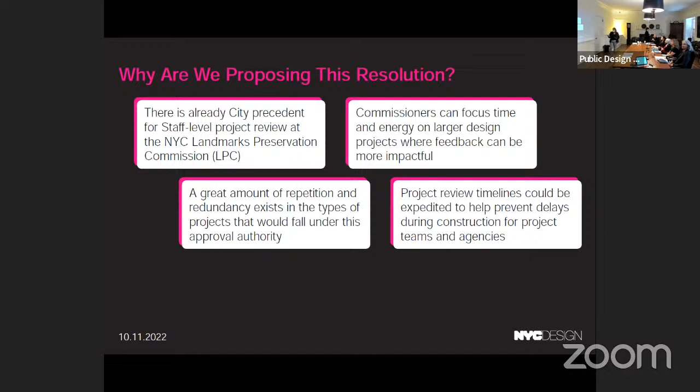There's already a city precedent at the New York City Landmarks Preservation Commission. We think commissioners can focus time and energy on larger design projects where their feedback can be more impactful. A great amount of repetition and redundancy exists in these types of projects that would fall under this approval authority. Timelines could be expedited to help prevent delays during construction, and lastly, many of these projects submitted to PDC are either invisible or minimally visible to the general public from the right of way.

So what is this resolution? We know we can further improve the functioning of the PDC as it fulfills its purpose to review works of art, structures, and layouts of public ways and grounds. It proposes to delegate authority to the PDC executive director for the review of minor post-approval modifications—projects such as building systems related to codes, regulations, and standards, and small-scale projects that vary minimally in design.

An example of this is when an ADA push button that was on a freestanding pole moved to the glass surface of the door itself. This solution was not foreseen at the time of approval. So now if I see this and staff sees this, we would be able to put it on the list because it falls under all the criteria.

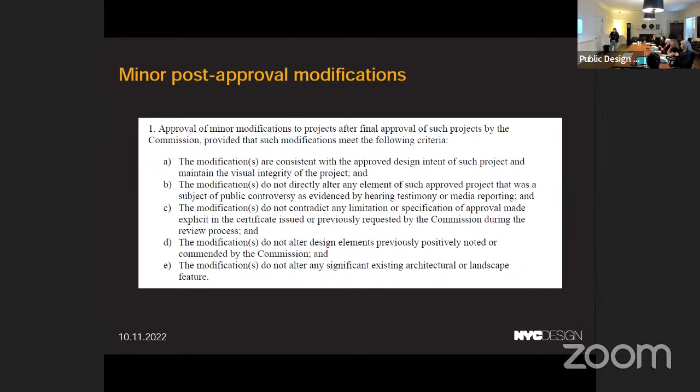The criteria are as follows: the modification has to be consistent with the approved design intent and maintain the visual integrity of the project. It should not alter any element that was approved and was a subject of controversy as evidenced by testimony. It does not contradict any limitation made explicit in our certificate, or if requested by any members of the commission. It does not alter design elements previously noted or commended, and lastly, it does not alter any significant existing architectural or landscape feature.

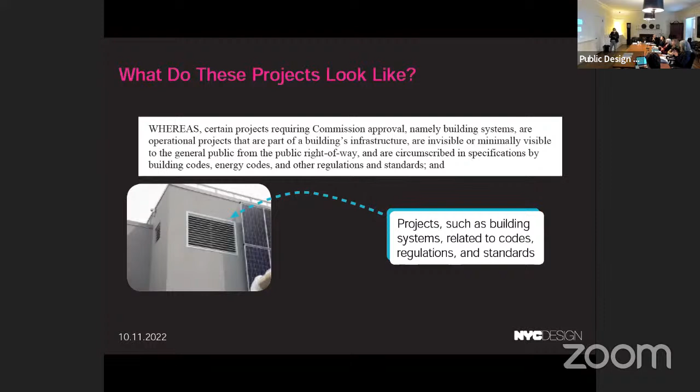Another example of this is mechanical systems related to building codes—circumscribed in specifications in our energy code standards and other regulations. Also, technology evolves, so these often come back to us repeatedly and we have to keep putting them on our agendas, but in this case we could handle it and then put it on our list.

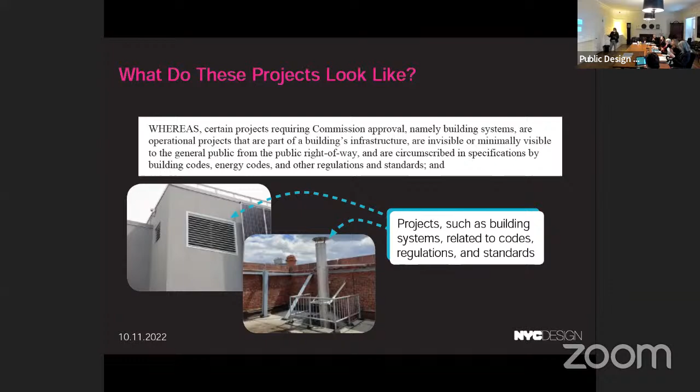These systems must be invisible or minimally visible to the general public and not change the character of the building or site. They should not remove or alter any significant architectural feature and should maintain visual integrity. Through-wall installation should be minimally detailed and not detract from the building or its features.

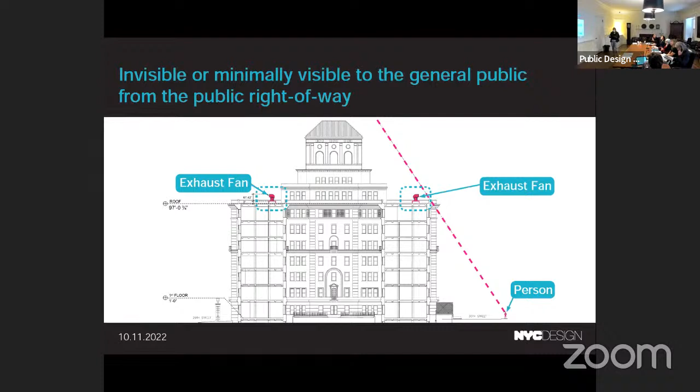An example of what we mean by minimally visible is this: if you're standing on the street or sidewalk, you can't see it. If you can see it and it's very extensive or expansive, we don't put it on this list, or if we do, we can take it off.

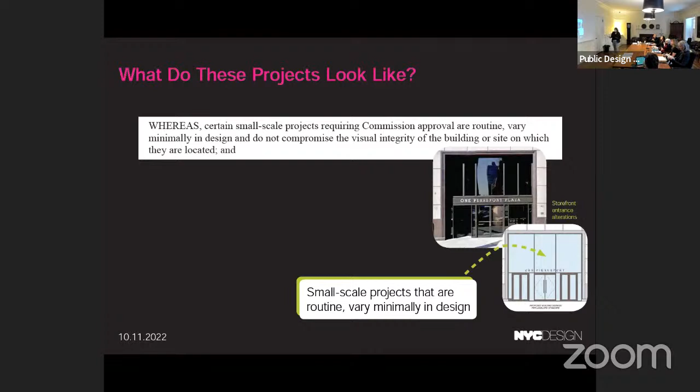So what do these projects also look like? Small scale projects that are routine and very minimal. For example, this storefront entrance alteration going from this to this, or this 7-Eleven signage staying in the same place but perhaps being illuminated.

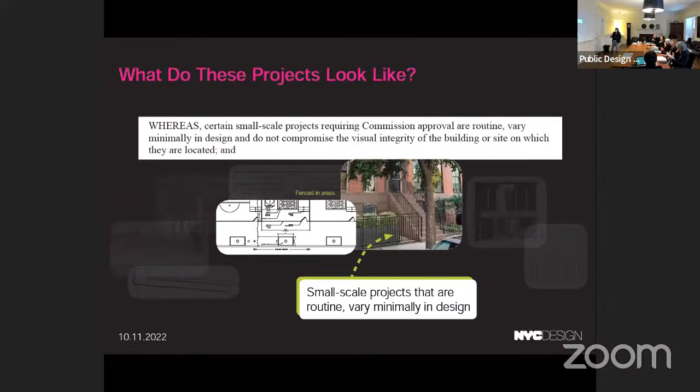So these are examples of projects that would apply, and also ball field pole lighting—things we see often and feel we don't have to always bring in front of the whole commission and put on our agendas. So this is all of them at once.

Small scale projects that vary minimally—these are the criteria that they have to follow.

Essentially it has to keep with the character proposed in the same location, in keeping with ADA guidelines. They do not extend beyond the adjacent properties, and ball field lighting should just meet the standards of athletic field illumination.

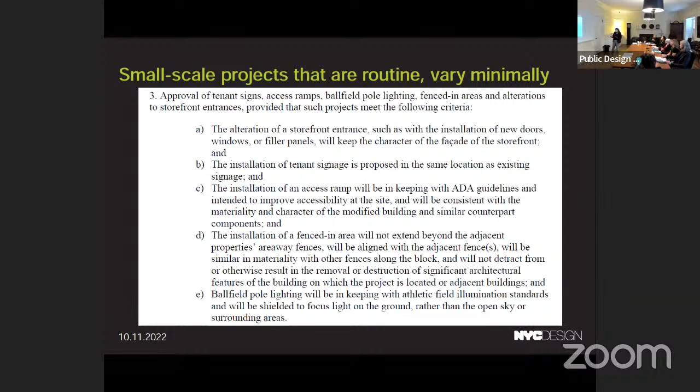And we, with our commissioners, decided that at least one member shall determine that a project falls within one of the categories described above before it's approved by the ED, or the PDC's next senior-most director in case the ED is on vacation or absent.

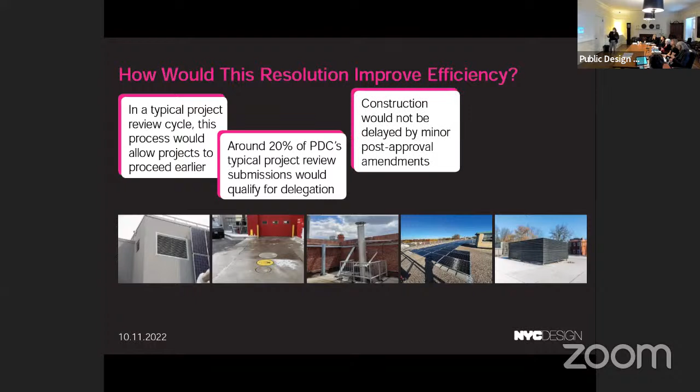So we feel this resolution would really allow projects to proceed earlier. Around 20% of PDC's typical project review submissions would qualify for delegation, and this is really a matrix of images that apply. Construction would not be delayed by minor post-approval amendments.

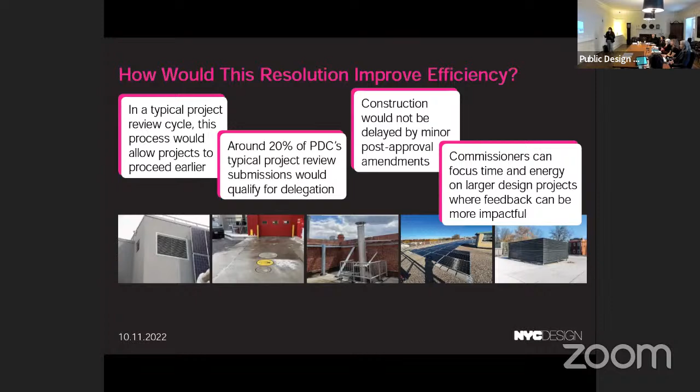And lastly, reiterating that this lets you focus time and energy on larger, meaningful projects, especially those in the public eye, that wouldn't apply under this delegation.

Here's the image of the text, and this is what we will be voting on today, which is in writing what I just presented to you today. Any questions?

Is it a requirement or a suggestion that one member of the commission will approve, question, or review? Or do you draw the one person from, let's say, three or four on the commission who have technical expertise, which for example I may not have? No, of course, other things. So that's my big question first, just to understand that.

Yes, so we spoke with Ken Smith at length about this because we very much appreciate his perspective that there should be oversight, and that one person who wants to look at it or volunteer should be able to do so. He has volunteered this time around, and in the event he is unable to do it anymore, we would talk amongst ourselves again and figure out who else could do it. So this wouldn't just fall upon someone without them being willing to take on the role or having a desire to.

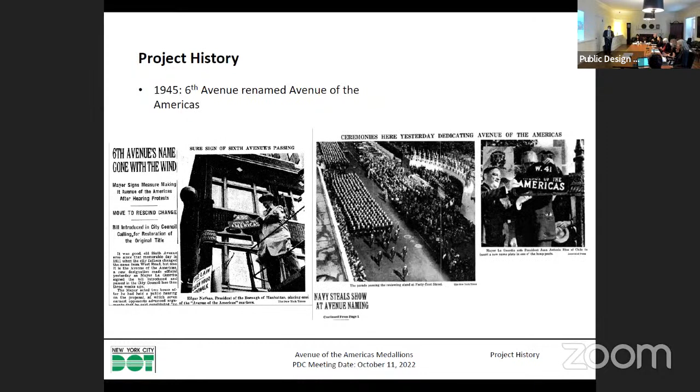In the 80s, the city refurbished the medallions to bring them back to a state of repair, but time has taken its toll, and they've continued to see deterioration since. The brackets holding them up have deteriorated over time, and the porcelain itself is a very heavy material, making it difficult for the agency to maintain. So we've made an effort to keep this program going while bringing it up to modern-day standards, including redesigning the bracket that holds them and updating the graphics.

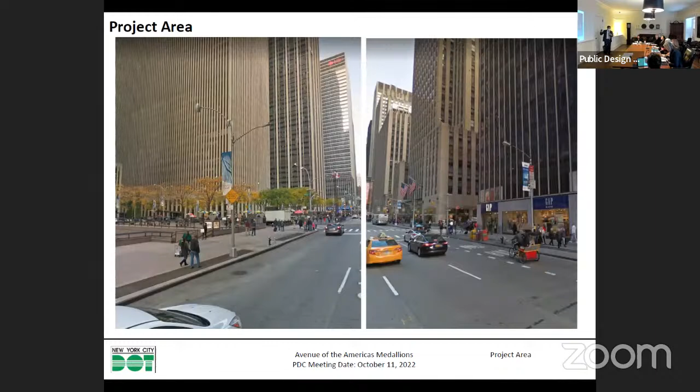So just to give a quick overview of the project, I'm sure many of you are familiar with 6th Avenue — pretty typical. This is up in the 50s and high 40s where we're looking to install the medallions. The medallions themselves will go on the light poles, similar to how they're currently mounted — we'll show you that shortly. They won't go on any pole that has a traffic signal or signal infrastructure.

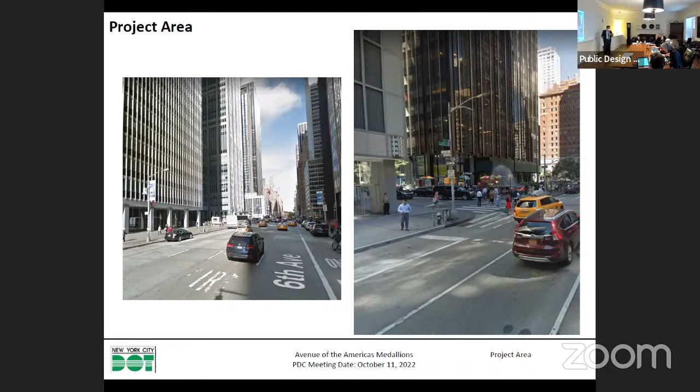From a safety perspective, almost nothing goes on those types of poles. Another thing to point out is we're also planning to ban the use of banners wherever these medallions are installed, so there won't be visual clutter competing with them on the poles. Here's an example of one that's actually up there — this is at 57th Street. You can see the bracket and the medallion installed towards the top of the pole.

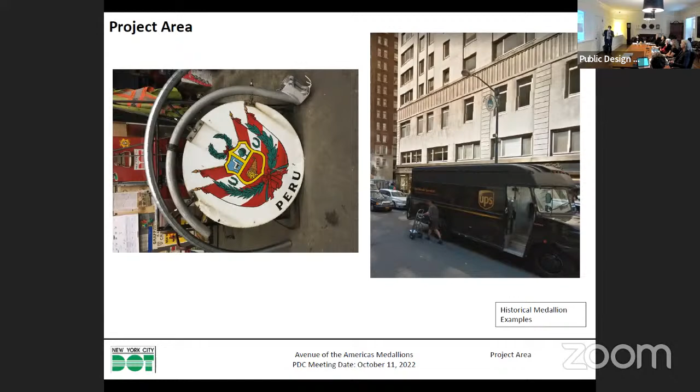Here's an example of one we had to take down in our shop — you can start to see some of the deterioration that's occurred. This is probably one of the better ones we have, actually. And here you can see additional examples still up on the poles.

Here's an overview of the locations we're looking at, again this is the 42nd to 59th area. There are a few poles with NYPD security cameras, so we won't install where there's a conflict. These are all mid-block poles, except for the ones highlighted in red, which are corner poles, but they don't have any traffic signal infrastructure on them.

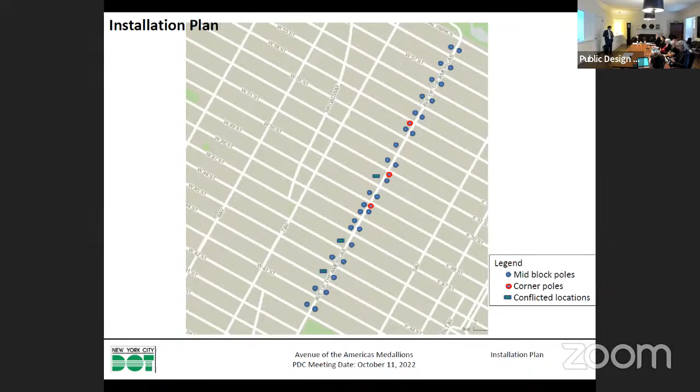This is the medallion we presented back in 2017. You can see the new bracket design that's made completely in-house by the agency, so we can fabricate these ourselves. If one fails, we don't have to go through a lengthy procurement to buy a new sign—everything is done by our sign shop.

This was the original design we mocked up, which hewed closely to what we had seen previously. Some comments from the commission were about improving the legibility of the coat of arms. These signs are installed quite high, and the coats of arms tend to be quite detailed—we can only do so much. We're not going to change each country's coat of arms, but we looked at how to improve things: studying the typefaces and colors for each country's name, and making an effort to remove some or all of the banners, which we're doing.

So again, this is the original, what we showed you in 2017, and you can see the medallion in front of you. This is where we're currently at.

We really did try to look at the graphics intensively. I have Kim Sillen from our graphics team, as well as Shane Stumiller, an urban fellow with urban design—sorry for not introducing them at the outset.

Kim can speak to a lot of the graphic details. We looked at a number of fonts, the location of the font, the color, the typeface, and tried to arrive at something sympathetic to the proposal—a font with a bit of character that works well with the coat of arms, and how the overall graphic is composed, so we bring the coat of arms closer to the viewer by putting the font on top, picking a font that has a nice relationship with the overall coat of arms.

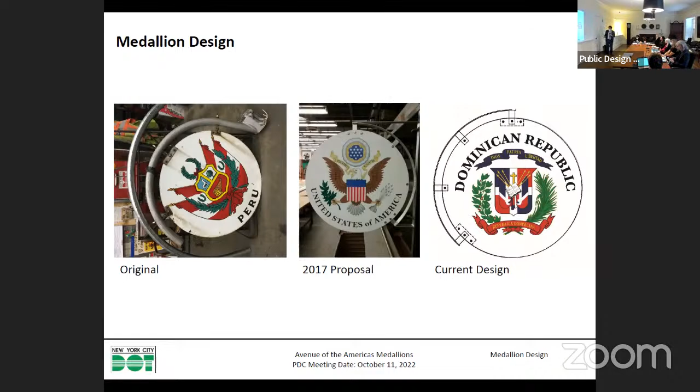Here are the design details—happy to come back to this slide at the end for questions—but this covers the type of font, case, size, location, and the size of the coat of arms. They differ a little based on each country, but are generally in the 2-foot range. The bracket design, as mentioned, is the same as we showed back in 2017—a new bracket design, but one we can manufacture in-house.

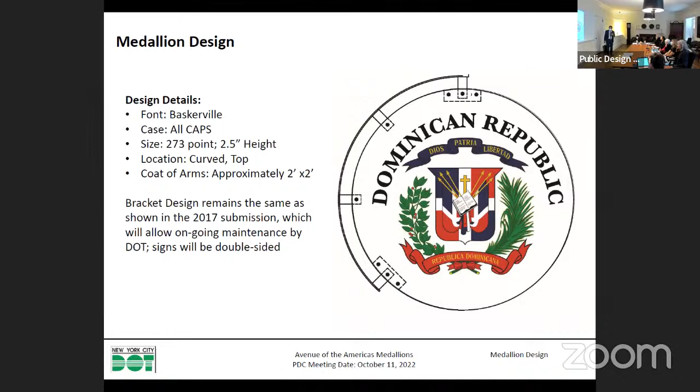In terms of what we studied, we looked at all the signs across the various countries. First, we looked at the shortest country name, which happens to be Peru, the longest country name, and then Trinidad and Tobago, and picked out a middle-length name to get a sense of what the composition looks like across these different countries.

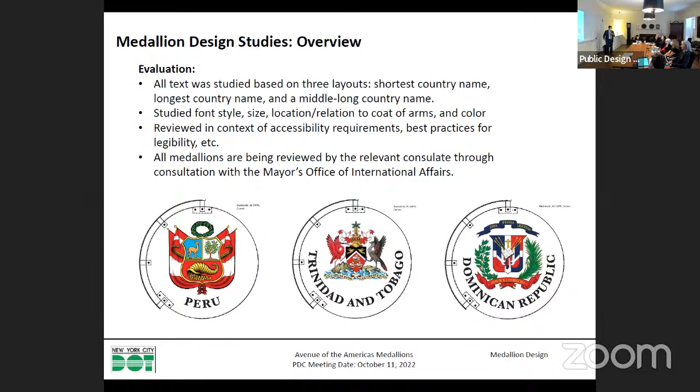It has some detailing that makes it a bit statelier than some of your simple sans serif fonts, like a Helvetica or an Arial. And so we think that really makes sense in this context.

You're gonna do 35 medallions for $150,000? Yes, actually less than that. Because it's all in-house, that's the difference. Of course, we have lots and lots of aluminum because we maintain hundreds of thousands of street signs across the city, so there's a bit of an economy of scale that you won't get commissioned.

Again, we moved the font to the top to try to bring the coat of arms down a little bit, making it more legible to people walking by. These signs will be mounted 25 feet in the air at the top of the light poles, so we're trying to bring the more detailed elements closer to the viewer.

We looked at a couple different colors, but for contrast, legibility, and ADA purposes, we stuck with black. There's also an option in a navy color, but we want to make sure this continues to be legible in all contexts. And all the banners are going to be removed, so it's not competing with anything for legibility.

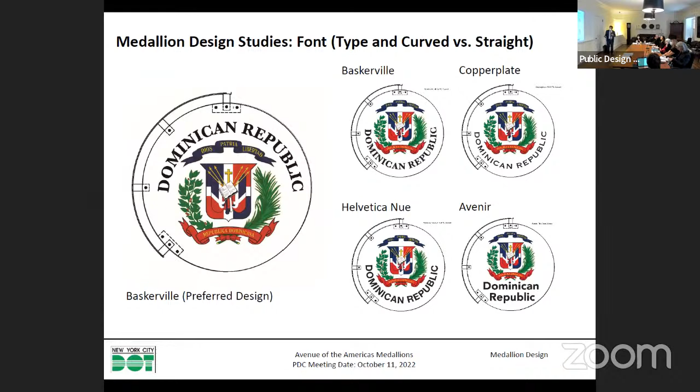So again, these slides just look at some of the different fonts we were looking at, as well as whether it should be a curved profile or a straight profile. We also looked at font type, whether it was condensed or regular.

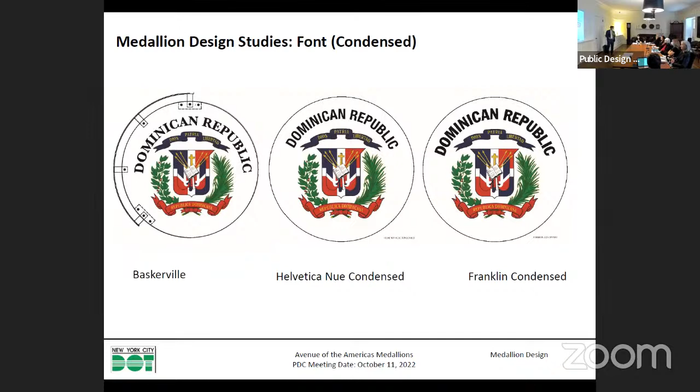On the left you'll see the proposal, so you have that as comparison across all the studies. Really focusing on trying to make sure this is as legible as possible—that's been our main goal. Top versus bottom, uppercase versus lowercase, black versus a dark blue.

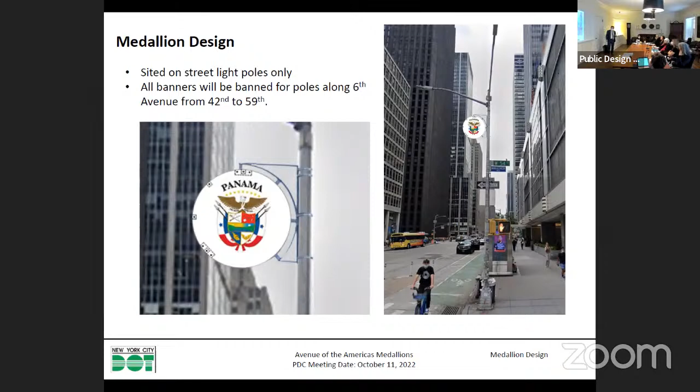And then the bracket being mounted on the side allows for it to be located a little bit lower on the pole too. These are the sign brackets, and like I said, this is being manufactured in-house, so if something goes wrong, we can fix it. That's the biggest thing—not something we were able to do with the previous sign. So I think this is much more sustainable.

What's the bracket made out of? It's aluminum, a thicker aluminum than our standard street sign—0.8 inches thick instead of the 0.125 bracket. The bracket is as well—the sign, or sorry, the bracket I think is. I will double check, it's either aluminum or steel. I will confirm that for you for sure. In either case, it's a material that we have and can reproduce with the same effect.

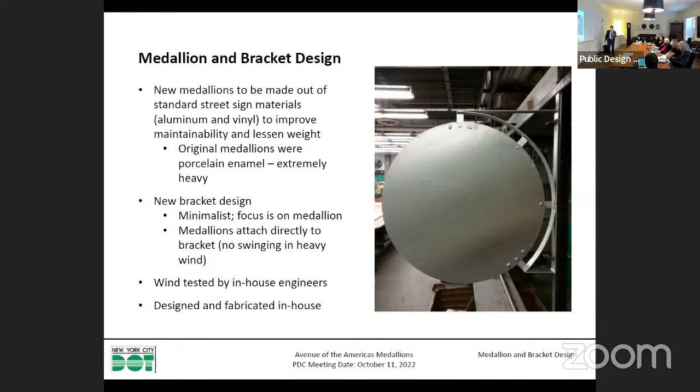Right, another point: the bracket design was reviewed by our bridge engineers and wind tested, so we make sure it doesn't behave like the previous signs, which sort of swung with the wind because of the way they were mounted. This won't have that same give, but it's rated to withstand those forces.

No, I think it's a structural steel that we have to maintain, but I can certainly get back to our sign shop to see what those caps are.

And like I said, unlike the previous signs, these are vinyl print. So if there is rusting or any issue, it will be a lot easier for us to reprint and reinstall those. And the overall cost for this is pretty minimal in terms of what we're spending on signs across the five boroughs. That's it.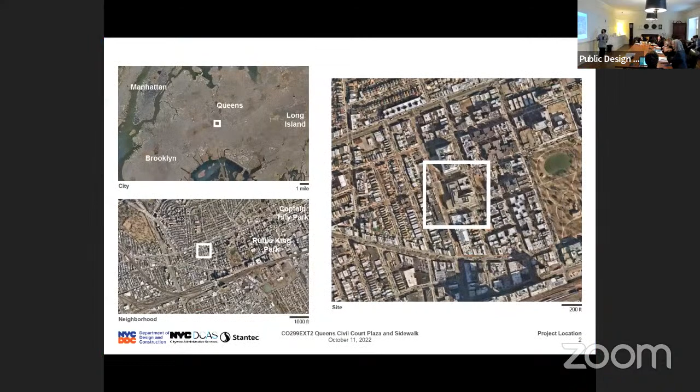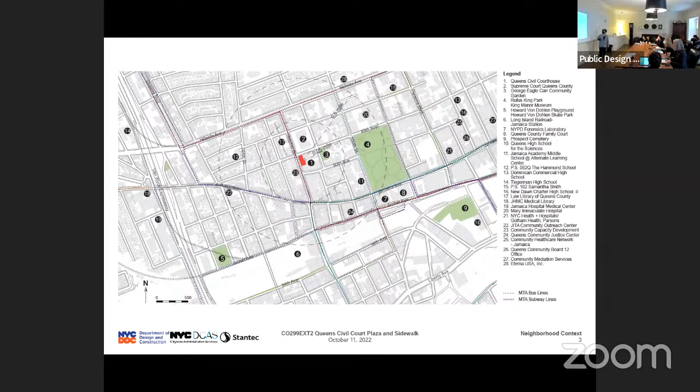Our Queens Civil Court is located in the borough of Queens in the neighborhood of Jamaica. The red on the map shows the location of the courthouse, directly adjacent to the Queens Supreme Court, shown as number 2. It's surrounded by different civic facilities such as library, hospital, and schools, and two blocks away is a pretty big community park called Rufus King Park.

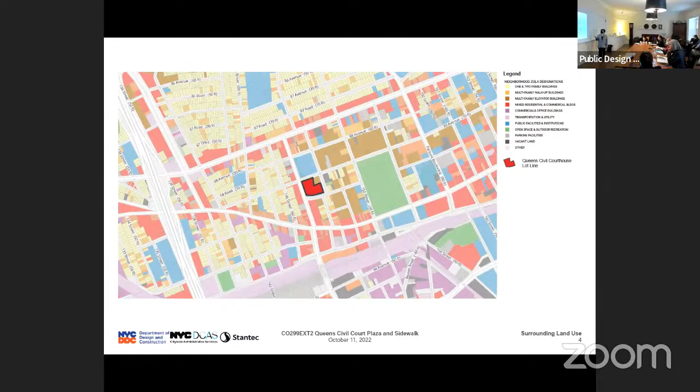As you can see from this land use map, it's located in a pretty busy commercial corridor. It has a grocery store across, different eateries and offices, and in the neighborhood a range of multifamily and single family housing.

This project is also on top of a parking garage, and one of the major technical issues is that a lot of water is leaking underneath. So one of the main goals is fixing the waterproofing at this plaza also.

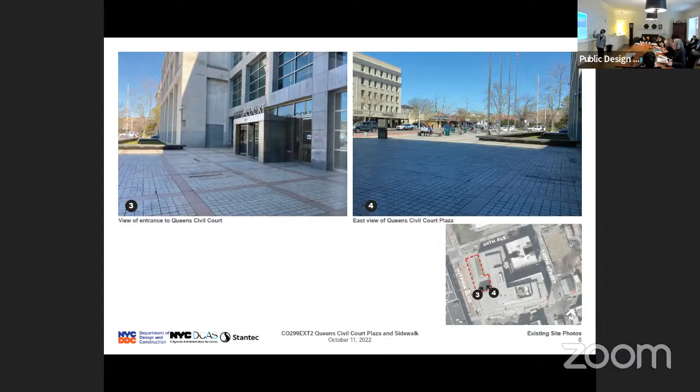From the entrance into the plaza, you can see there's a sunken lawn right outside where the jury usually waits for their duty. The lawn is pretty sunken and surrounded by a granite seat wall, making it pretty inaccessible. You can also see the 4 flagpoles in front, and the granite black signage closer to the sidewalk, and we're trying to keep those elements in the plaza.

Further zooming into the plaza and the lawn area, there's also an air fan in the lawn that we also need to incorporate into our design.

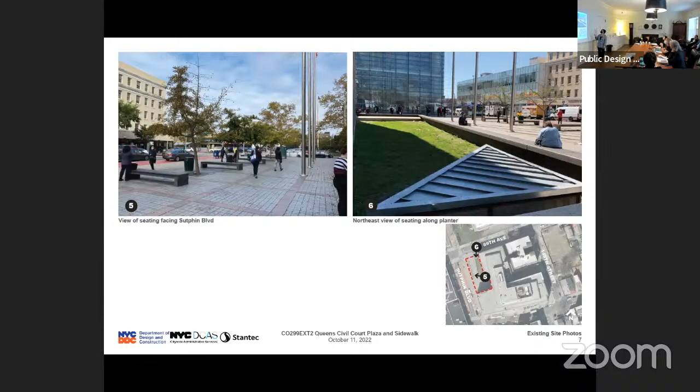Number 7 shows the southern side of Sutphin Boulevard going into the big hardscape in front of the entrance. Number 8 shows mostly people who sit here, usually jury members or people waiting for the bus on Sutphin Boulevard. They're pretty much by themselves, and there's not much activity after courthouse hours.

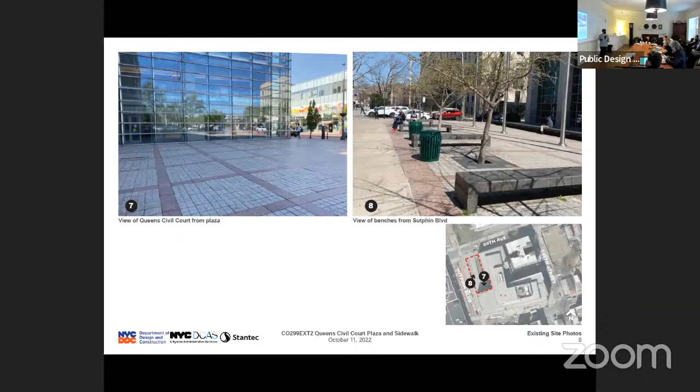As I mentioned, this is on top of a parking garage, so this is just a record drawing showing how we're going to integrate it with the existing structure. On the left side is Sutphin Boulevard, and the sidewalk is not part of our scope. In the plaza, you can see the ginkgo tree, which is basically a tree pit tied to the structural slab. The plaza is basically hardscape on top of subcourse and on top of 2.5 feet of lightweight insulation.

There's a 3-foot soil depth for the sunken lawn. So just so you know, we understand the need to keep the current structural design and assembly when we look at the plaza.

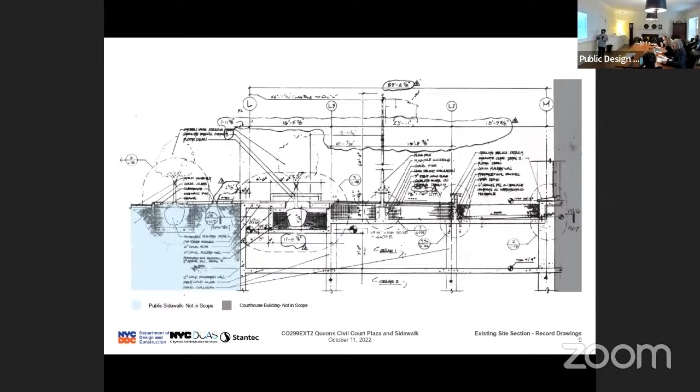Another thing I want to point out is that there are existing lights at the benches, so as we develop our design, we integrate linear lighting into the seating also. One additional thing is that there is currently irrigation installed on the site, but it was broken since day one, so DCAS is really hoping for planting that doesn't require irrigation to maintain.

Understanding DCAS constraints and the programming of the courthouse, our design proposes one unifying open space to activate the plaza, with elements that are also low maintenance and easy for the courthouse to maintain. We're introducing 3 playful, unique curvilinear planters with benches placed throughout the plaza.

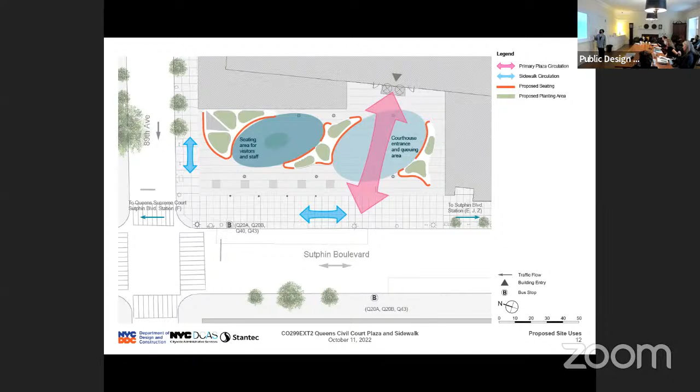Zooming into the elevation to show how this planter will work: along the edge of the planting we'll have a higher wall that allows us to build soil depth for the proposed planting, while also serving as a backrest for people sitting here.

This elevation looks toward the courthouse. On the left is the jury duty room, with more planting in front. On the right is where the entrance will be, with lower planting that still gives space for people to queue.

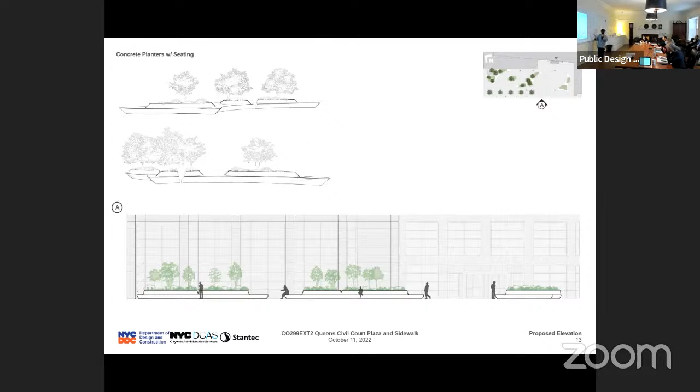Looking into how it ties into the existing structure, we want to keep the existing ginkgo tree, keeping the tree pit tied to the structural slab.

We'll also fill in the lawn area with lightweight soil, aligning the existing paving with the proposed paving in the same area. Essentially the planter will sit on top of the paver, making the planting much more self-contained and easy for DCAS to maintain.

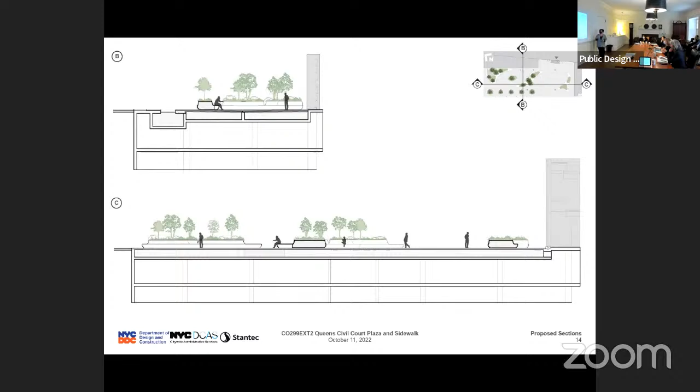For materials, the concept is to keep the concrete lightweight and light gray, with minimal metal armrests for better accessibility. The concrete paver will be a neutral color. The planting concept features a low variety of flowering plants and shrubs for ground-level interest, with flowering trees on top.

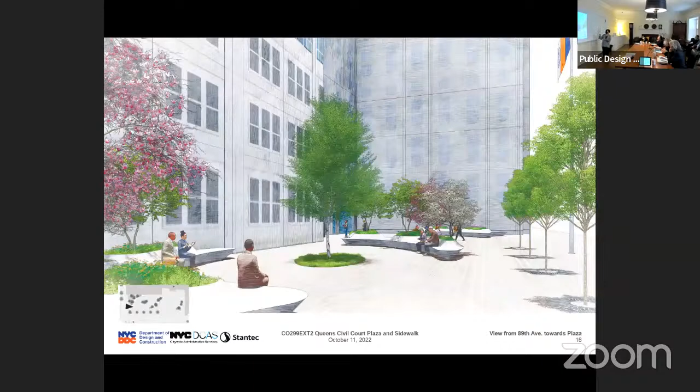Looking at the plaza from 89th Avenue, you can see how the curves form a quiet space with in-ground planting as a focal point, and the entrance tucked further back. The planting area makes the space less empty while keeping low planting to preserve visibility.

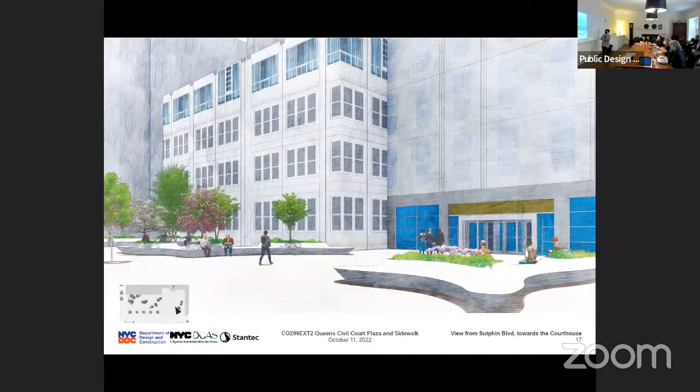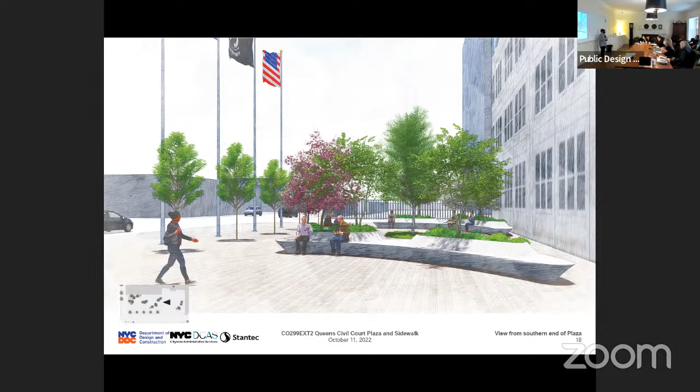So this is essentially my presentation. We really hope to create an activated area that's good for people visiting the courthouse and that can be maintained by DCAS. Thank you. I don't know, does Catherine want to add a word for DCAS?

Catherine's not on the Zoom yet. I don't know if someone can try getting in touch with her again.

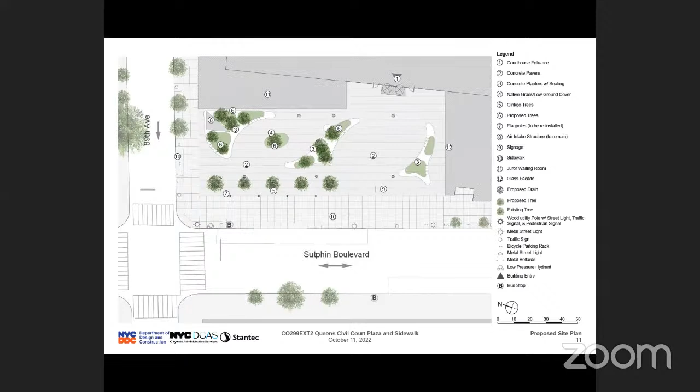It looks like she's on now, no? Yep. Who is she? It's a representative from DCAS, Catherine Lawrence, the landscape architect in charge of the project. From the working agency, closely with us. There she is. Hi, Kate. Hello.

Should I start? We went ahead and have gone through the presentation and had some conversation, but if you want to go ahead and speak to the points you were planning to in your introduction.

All right, my name is Catherine Lawrence. I'm the senior landscape architect for DCAS, and we are doing this renovation. The presentation you see is the renovation of Queens Civil Court Plaza, located at 8917 Sutphin Boulevard.

We've got everyone along, we've heard a lot of this already. But you asked a really good question, and I'd like to hear the landscape architect in charge answer. That would be helpful. Catherine, your designer did the full presentation, so we had a few questions, but before I share those, are there points you would like to make from DCAS's perspective that would not have been covered by your colleague from Stantec?

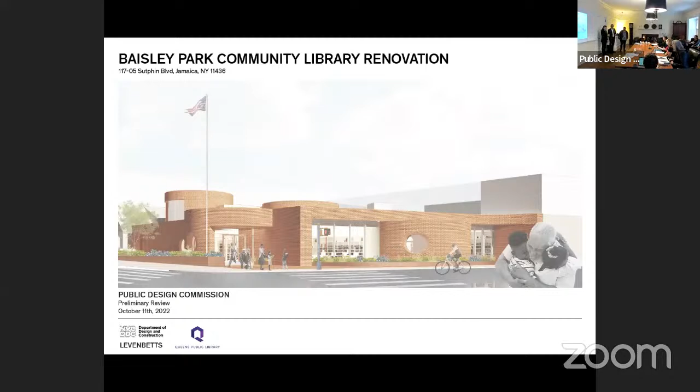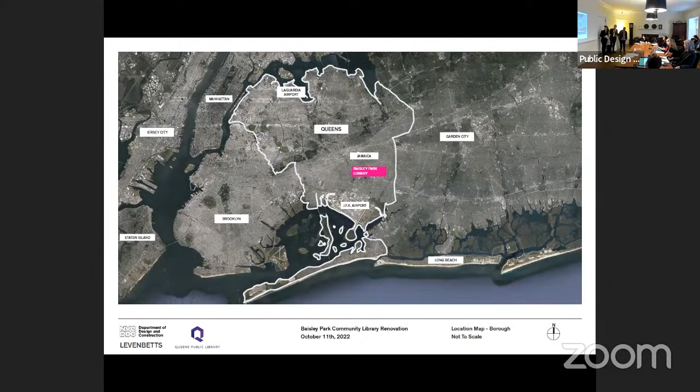We're going to start talking about the library briefly, beginning with where it's located in Queens, in the South Jamaica neighborhood, also known as the South Side. The site is bounded by a series of commercial and religious institutions, as well as a daycare center right next to the library.

The main thoroughfares are Sutphin Boulevard, which runs this way, and Foch Boulevard, a very important street as it runs from the heart of the neighborhood down to Baisley Pond Park, which is the main green infrastructure in the area.

The library is on the corner of Foch and Sutphin, so there's an opportunity for that sort of corner view.

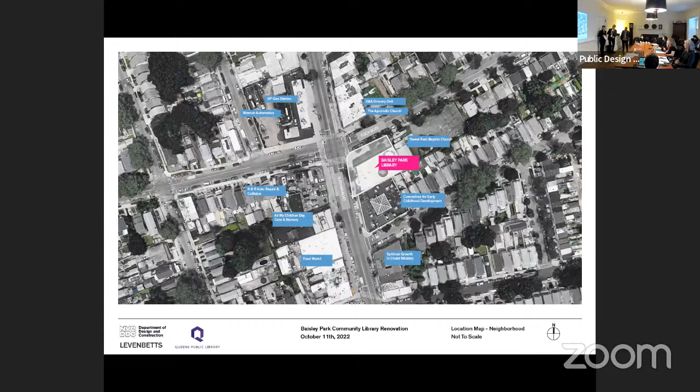One of the things we'll point out is this curvilinear form that exists at the front and at the penthouse. This is the entry along Sutphin, on the corner, and then this is Foch.

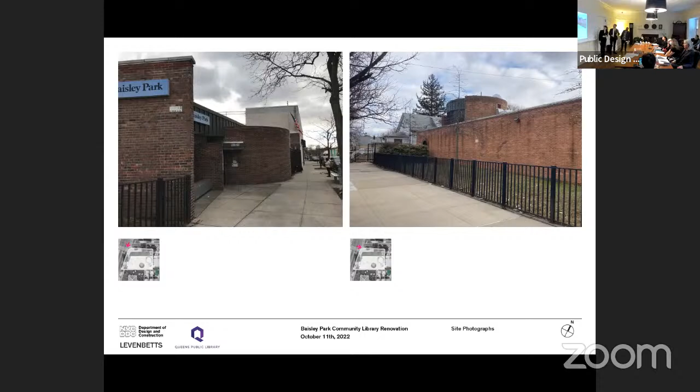One of the things you'll notice is the Foch side is basically a blank facade. There's an existing side yard that's not being utilized at all, and there's a fence as well. So this is one of the things we were interested in: activating this side yard.

Again, views of Foch, you can see it's a very blank facade. This is the corner of Foch and Sutphin, showing this very blank view, and this is from Foch on the residential side, looking back at the library towards Sutphin.

This is the aerial view here, which is critical in many ways. Again, Sutphin here with the existing entry, and Foch here with the existing side yard that's currently fenced in.

One thing to note, because this will come up later, there's an existing circular theme in the building that we actually fell in love with, and we really looked at this circular theme as we developed the exterior.

There's an existing exterior courtyard that's actually being closed in just in order to accommodate a growing population of children in the library as well as elders.

The building was built in 1968-69. It was designed by an architect named J.A. Daydon, and we can see this circular theme that runs throughout the building, which is something we're obviously playing off of.

This is the proposed site plan. We're adding a vestibule on the Foch side, but facing Sutphin, enclosing that open courtyard while still allowing light in for a children's area.

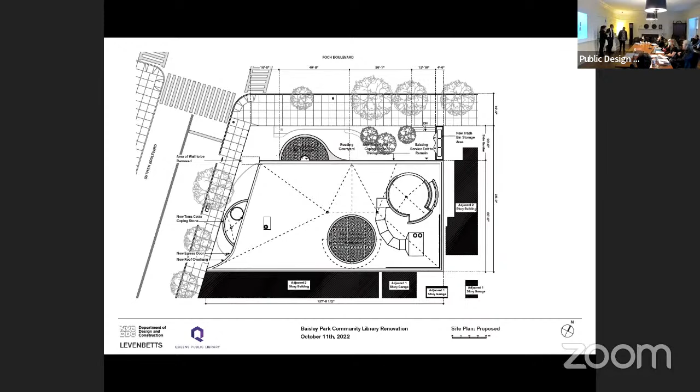Elizabeth's going to talk a little bit more about that in a minute when we go through. We can go through the plans quickly.

This is the proposed plan. The main intervention is relocating the facade to the Foch side to activate that side yard, which Elizabeth will talk about from a landscape standpoint, and opening up the Sutphin side, keeping the circular theme of the rest of the library. So this vestibule has a curvilinear form, enclosing this area with light for the children's area.

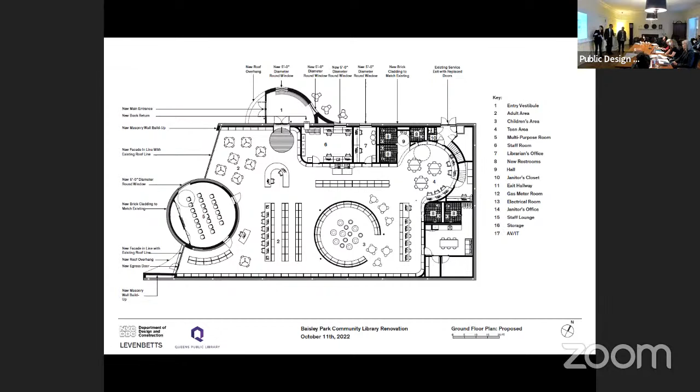So this is the proposed. It cannot be accessible because there's no ADA access, so we're not adding a lift or anything.

I'm just curious, how many floors is there going to be? It's mostly one, with just this one—we'll call it a kind of pop-up, a penthouse space. So it's one low story.

Yeah, and this is totally—but it's basically not being used because it's not ADA accessible. So we're even removing the bathrooms and actually doing a cutout in that floor to bring it in.

All of these buildings, just adding outdoor space—I've built a lot of libraries, in a lot of different locations, for a lot of different reasons. One of the things is communities love the outdoor, rooftop spaces, particularly now with COVID or whatever.

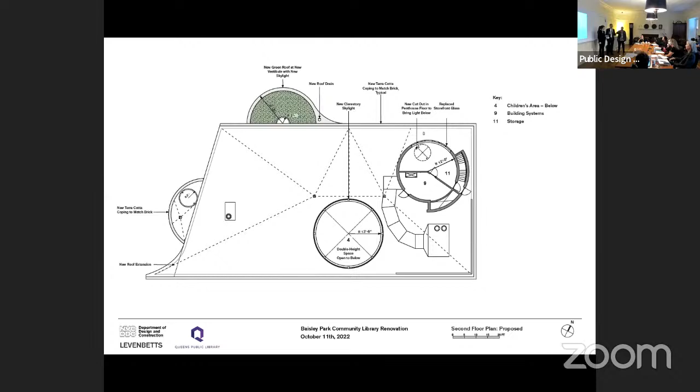This is the proposed, this is the existing, then the roof plan. We can look at this quickly. The proposed roof plan is where we're capturing that space and adding a green roof there as well.

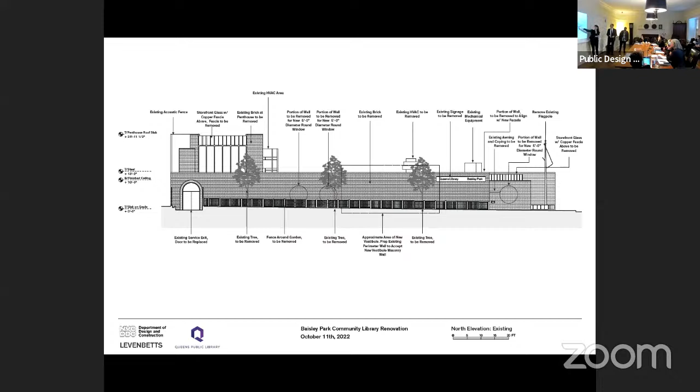So we can just show the proposed, and we have renderings, so it'll be easier to see—opening up that Foch side with these round, five foot in diameter windows that give light into the staff offices, the librarian's office, and the vestibule, as well as the new multi-purpose room, and then the landscape that Elizabeth will be talking about.

The vestibule actually pops out on the Foch side, but the doors are still facing Sutphin. What we're able to do is really open up this portion of the facade, and then this existing round form is now going to be the multi-purpose room with an additional window.

So if you're on Sutphin, you don't actually see the doors, right? Well, you do here, you see—if you're coming from west to east, you don't see it. I see, the plaza then steps back. Okay, I didn't understand, now I do. I think the 3D is going to help. The existing entry is very tight. Right.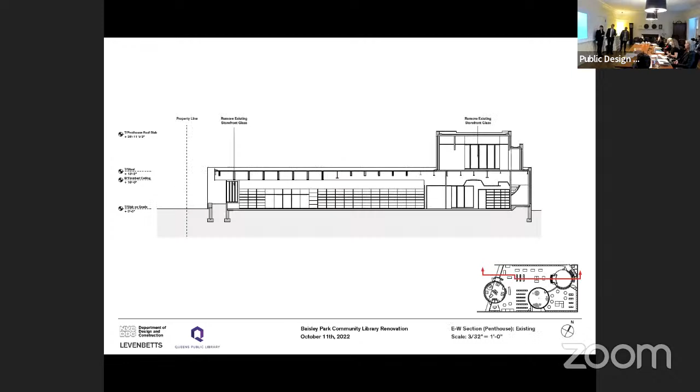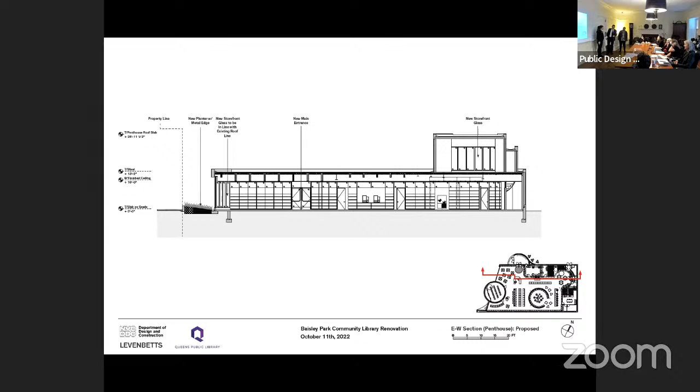These are building sections of existing, looking towards Foch, with no windows. This is the section through here, which we have what we affectionately call the bookworm, running along the perimeter on the inside of the library to keep the light and openness on the interior, and bringing the light down from these windows so it can be refurbished to wash into the teen area. This is the other section through these two spaces.

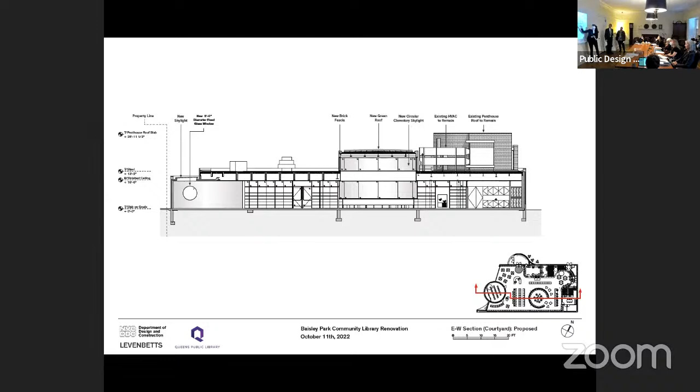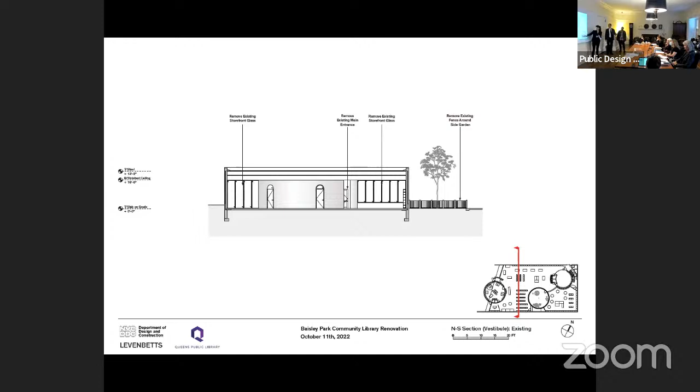As well as the back area, which is existing and currently stepped up, we're lowering those floors to make it all ADA accessible, and then popping up that area, which is the existing courtyard, but with clerestory windows so there's still light coming down into that children's area. And then this section, the short section looking towards Sutphin, which is the existing library, and then the proposed, which also has the vestibule.

Do you want to talk about the landscape? Well...

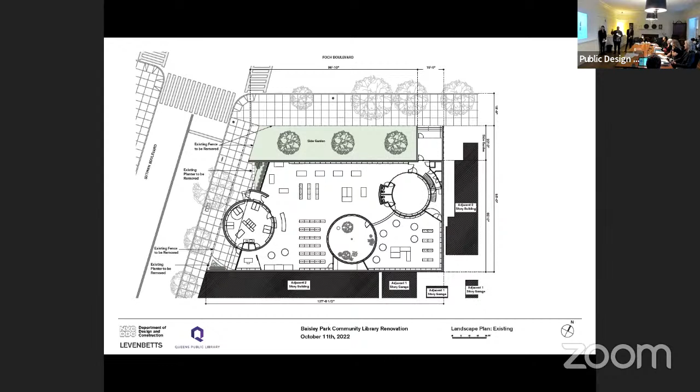To follow on the comment about the engagement with the landscape and the opportunity, we really saw the setbacks on the property as a real jewel to the community. Most of the public buildings in the neighborhood don't have this setback, don't have a sort of formal or even informal acknowledgement of the realm between the fully public and the semi-public. We thought there was an opportunity to reconfigure this landscape arrangement so there was a community amenity that created a threshold to the library itself.

So what you can see here - I have to come close because I refuse to get glasses and I can't see - but we are limiting the planting idea at the ground level to two defining planted moments, I would say.

One is the planting bed that would define the street edge along Foch Boulevard and create various areas of exterior program: seating courtyards, learning courtyards. This planting is reminiscent of a butterfly garden, referring to the nostalgia of early Queens development. And if you're on Facebook at all, you can see that this nostalgia is rampant.

We're also talking about bringing this same planting language to the front of the building along Sutphin, so that from the reading room and areas around this minor entrance and exit, the landscape also engages and has a sense of extension into the interior space. So to reiterate, there's one area that's more plaza-like, and the other that's more meadow-like, in its extension and treatment of plant materials.

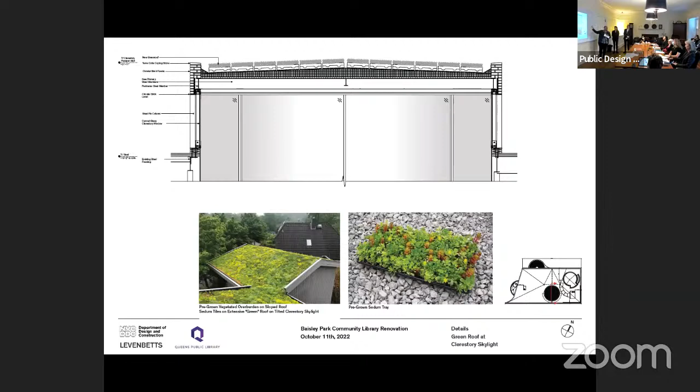In terms of materiality, the idea of creating a continuous surface from the walls to the floor will be continued with the materials in terms of the bricks. This tree sort of made it in to make sure that it's grounded, but the Amelanchier tree, in terms of its scale and understory, also lends a certain proportionality to the entire scheme.

The materials along the bottom continue what Elizabeth was talking about, especially the paver, which is this idea of the brick of the building. The existing building is brick. It has two different types of brick and about 38 other types of patch brick. So in its current state, it's a bit of a mismatch.

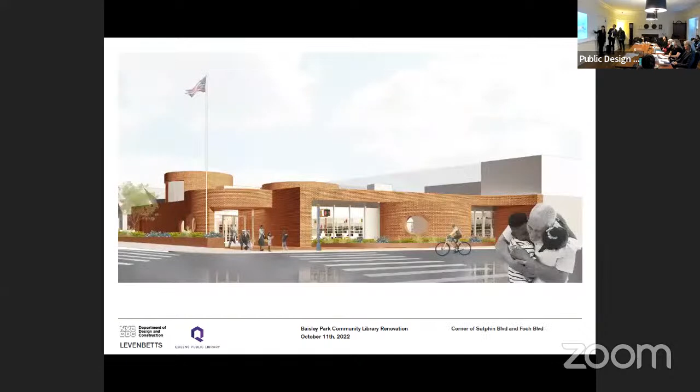So this is again the view from Sutphin and Foch, that corner view we showed at the beginning. This area is much more opened up in transparency, a welcoming facade to the community, and then the new vestibule that is still facing Sutphin, but on the box.

I think one of the important things about this image is what we were really trying to do is take the circular theme that was within the original design. There were some collisions due to pragmatics of the way things were built at the time. And we've tried to give each form its own integrity, its own identity, while keeping them in an assemblage that we hope is holding together, especially using the red brick.

And you can also see the circular window theme that pops out onto the round community room, which will also provide a glow in the evening time.

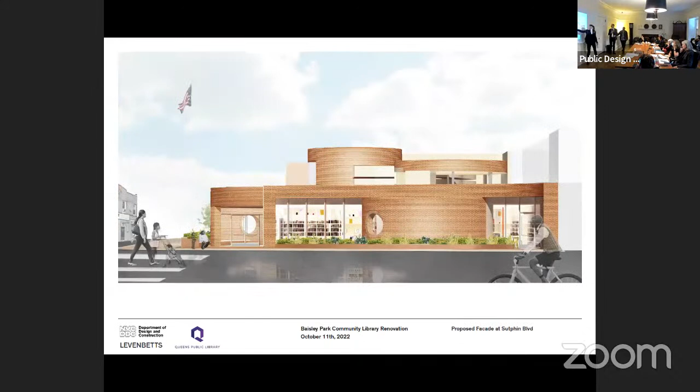And this again is the box, so opening that up to the side garden, puncturing it with these 5-foot diameter windows. And just going back to the Sutphin view, you can see the entry here, this being more opened up. I think there's one close-up view at that entry.

We have identified several areas for the potential location for the percent for art, so either in this vestibule on the exterior of the multipurpose room or in the ceiling of the children's area.

And I believe that's it. Yeah, thank you.

Great, very cool. Thank you very much. Very ambitious renovation. I wish you did have more money.

I know that's always a struggle because it's a one-story building. I really appreciate the landscape strategy also, it's very thoughtful and elegant. I don't really have any questions. I initially asked about the ground, but I understand what you're trying to do with the materiality of the building coming out and having more of a presence.

I was curious about the section, probably a detail. Where are you guys in the process? Are you in DD? We're just at Early DD, design development, so schematic design development, they don't have the artists yet.

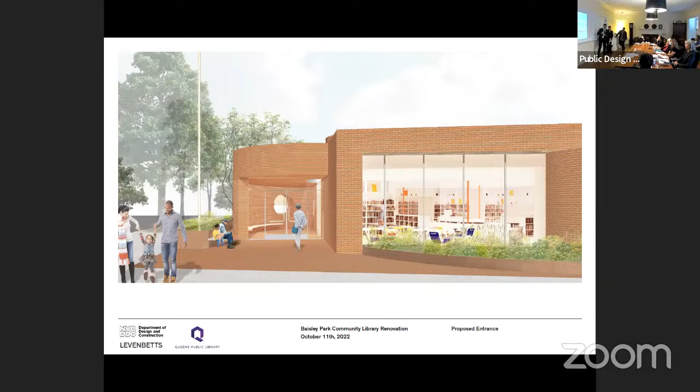Is there an opportunity there for like a cool little seat for kids to read in those beautiful windows? This is the brick inside the vestibule, and there's a bench. No, I meant in the building itself, where there's a kind of thickness to the round window. No, those windows all occur in the staff offices, which is this window here. So there is an opportunity at that point, could be the favorite seat in the whole library.

So when you're in the staff room or the reading room, is there any translucency where you might understand that window? Yeah, these are glass doors in here, so when you're in this space you're still getting some shared light. The interior, this is what we affectionately call the bookworm. You have books, but above that we have transoms, so there's shared light that occurs in the transom. The books will be only at a certain height, and then there'll be the transom that becomes shared light. Similarly, in areas without windows, since there's quite a bit of light coming from the clerestory windows in the children's area, there'll be some shared light for the staff lounge, since these two exterior walls have no possibility for fenestration.

And what's the ceiling in that meeting room, the multi-purpose room? You said the ceiling of the little room is available to the artist, but here you said the wall, not the ceiling. What if somebody wanted to do all ceilings? This one is higher, so there's an opportunity to do artwork in the ceiling here. The rest of the library is getting a mesh ceiling that allows for acoustics, and also just to make the one-story feel taller, but then have a sort of datum.

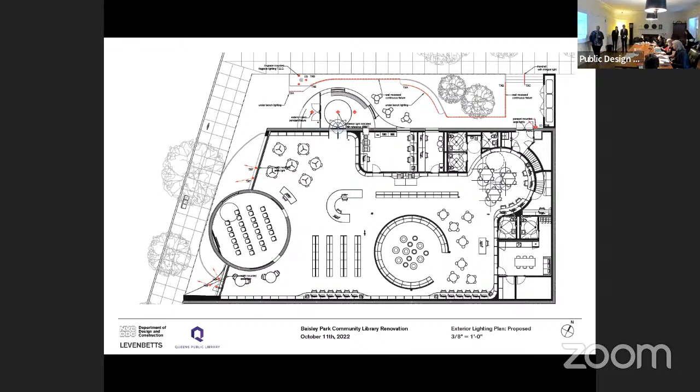Is there - I don't recall from the rendering - can you occupy the landscape there? Not in the front. That's meant to be just a planting bed that actually slopes back towards the building. That's the ambition for it - we still have to figure out the geometry, but from the inside you get the sense of continuity of the ground plane.

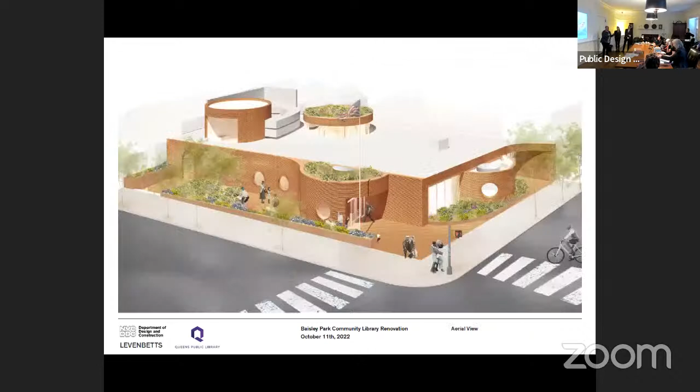I see. And you were talking about butterflies, but I didn't see - I'm sure you're going to put butterfly bush in your planting plan. Well, it's considered invasive, so we always look for the alternative, and we just load up on Asclepias. Oh, I didn't realize it was considered invasive. Good to know.

So the planter on the left side of the slide is higher, so that makes that space more of a room edge there, and the other one's lower. The intention is to try and figure out a way of sloping back towards the glazing.

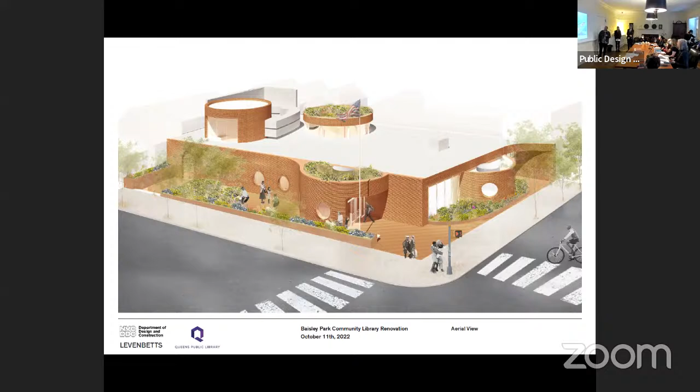Can you go back to the schematic of the interior? I'm curious about the children's center - that's an existing structure, so the opening is new? Yes, there's an existing courtyard there, right now it's open to the sky. There's a glass enclosure because the existing space is an outside courtyard, and we're going to be glazing it with an interior glazing, but then it's accessible as a room - it's not outside anymore.

I meant the way it opens here, that doorway - is that existing now? No, this is an outside space right now, so this whole thing is going to be enclosed in glass. Okay, but it's opening to where other people are seated, near the computer terminals and children's area - and this is the children's librarian area. They're intentionally placed in this part of the library from a security and protection standpoint, so they're away from the doors.

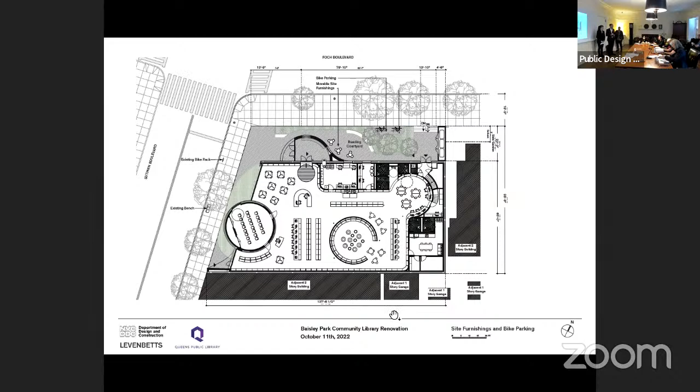Any more questions or comments? Okay, well, just to summarize, all commissioners agree this is a lovely and very fitting renovation of what will be a very treasured community space, with an excellent landscape plan to boot. So thank you for that, and we look forward to seeing you in the spring. Thank you very much.